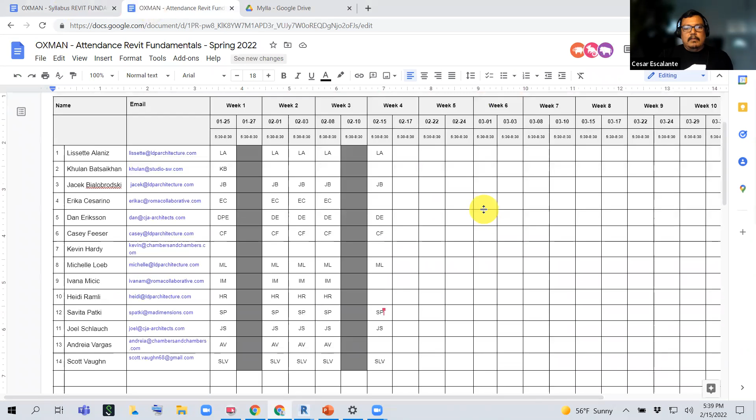It's Mylla_Hytt_start3.rvt. The link is on the chat panel, just click on it and download it if you want to start with my data set. If not, you can feel free to continue using your own data set. Okay, make sure you sign your name. I don't expect to miss any class moving forward, so we should be okay.

All right, any question about the schedule for today and the next couple of weeks? This week and next week, so the next 3 weeks, we're just going to focus on this data set for the next couple of weeks, and we're going to try to wrap this up by next Thursday.

And then starting in March, we will jump into documentation and data analytics. There we're going to jump into how we manage information inside Revit, how we add custom information, the different types of parameters and scheduling data, moving information in and out, and then additional documentation, workflows, detailing, phasing, managing sheets, etc.

All right, so this is the data set, hopefully everybody got that. I am on level 1, and I'm going to start streaming this on YouTube. Give me a second.

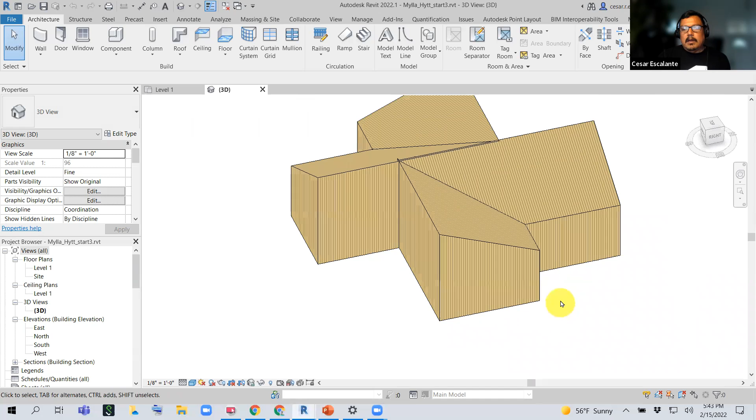All right, so we are on the Mylla house. Last time, where we left it was we created face-based walls derived from massing objects, and we created a representation of the house as you see on the screen. I helped some of you sort out some difficulties at the end of class.

One of the things I want to review quickly is how partitions connect in corner conditions, because I think I went very fast on that. For that, you don't have to do this yourselves. I'm just going to create two different types of walls and start a discussion on how that works.

So I'll have two walls connected at the corner, and then I'm going to switch one type with another, so we have two dissimilar walls connected at a corner. I'm going to switch this to fine, and you can see all these different layering systems.

One of the things I explained last time is that in a corner condition, there's always a primary wall and then a secondary wall. The primary wall is the one that dominates the corner condition. In this case, it's this partition.

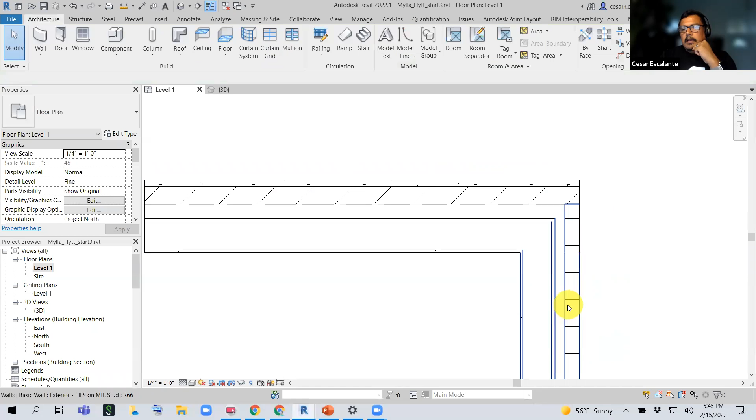And then the internal layers of the two different walls connect using the function and the priority number. If you recall, the priority number is a Revit way of connecting different layers that have similar functions.

The easiest to understand is the structural layers, that if they share the same materials, they connect seamlessly. That's why, in this corner condition, we have the core of this wall connecting seamlessly with the core of the other wall. They have the same width, the same material, so there's a clean connection.

Now take a look at this other one. This is a finish on one of the walls, and then this is another finish, and they have different materials. That's why you see that because they have different materials, they represent differently, and therefore you'll see that they abut, but they don't merge.

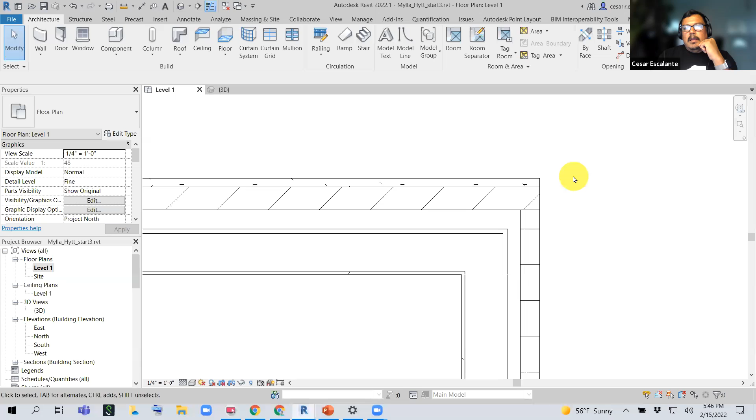The other thing we did in the last class is understand how corner conditions can be modified. We use this tool under the Modify tab called wall joints. Wall joints allow us to override the default behavior, or the default relationship, between the primary wall and the secondary wall. I'm going to illustrate now how this works.

So if I go into the Modify tab and hit wall joints, and hover over a corner condition, you're going to see this big square around the corner. It's just a way to identify visually a corner condition. As soon as I select it, I can cycle between different corner conditions using the options in the options bar.

So I have three options: butt connections, miter connections, and square connections. If I hit the next button here, I flip the primary wall in a corner condition. Sometimes you may want to do that, sometimes not. Let's see, and as you hit next, you keep cycling between potential options.

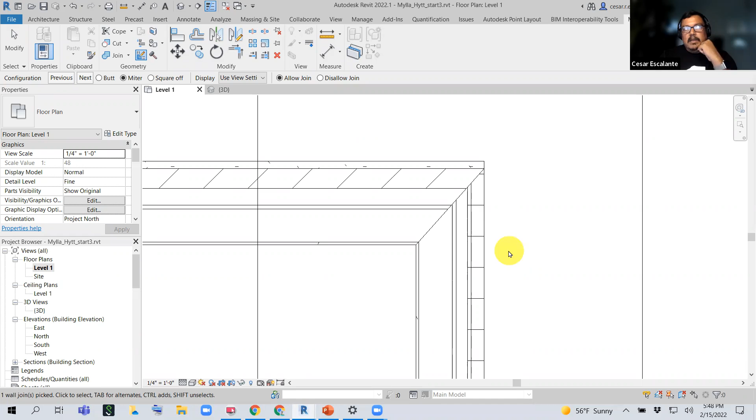This is sometimes not the way things get built on site, but if you're doing furniture construction or some kind of wood construction, sometimes that's the way to create those corners. And if you just care about the visual display of a symbol, sometimes miter works or creates the desired outcome.

Hey Cesar, remind me, right now when I look at my walls, it's gray and black, how do I get it to show all the different patterns? Yeah, just go into the detail levels in the view controls and switch those to fine. Ah, thank you. Yeah, when you switch to coarse, they are grayscale; when you switch to fine, all the layers are displayed.

Okay, so I was talking about corner conditions. We have the miter conditions. And then there's another one called squared off.

This is a condition in which layers of the same function will be forced to align perpendicularly.

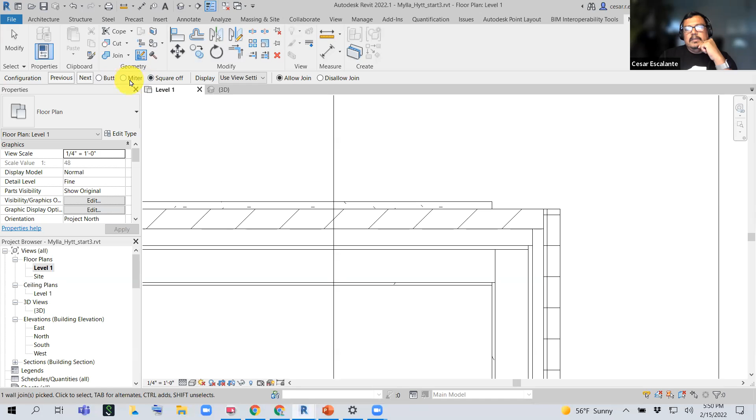Notice how the butt condition and the square off conditions are similar, but they differ when I have different angles. Right now the connection angle between these two partitions is 90 degrees, but as soon as I turn that to another angle, you can see now that this corner condition has a square off connection.

When I do it again, this is the corner condition. Butt condition is forcing the layers with the same function to connect, and square off makes the primary wall maintain perpendicular layers and make a connection with the opposite wall.

It's just different ways of dealing with that connection. And then when I click next, these are the different options that I have.

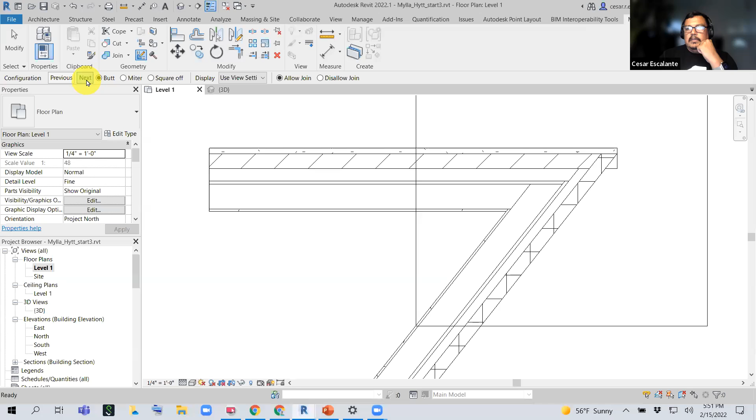So again, miter conditions - these are the two different options. When I click next, those are the different butt conditions. Then we have miter. Then we have a squared off. And every time you hit next, you get a different condition.

Now this is a Revit educated guess to display how connections work. It may or may not be how you actually build it on site, but I think as an educated guess, it's a good way to display it at a certain resolution. When it comes to crafting this at a greater detail, if this was a detail of a corner condition, I would review this with a technical eye and maybe make changes and amendments on how the different layers connect and the different connection types.

So I just want to mention that because I didn't explain it very well in the last class. Does that make sense?

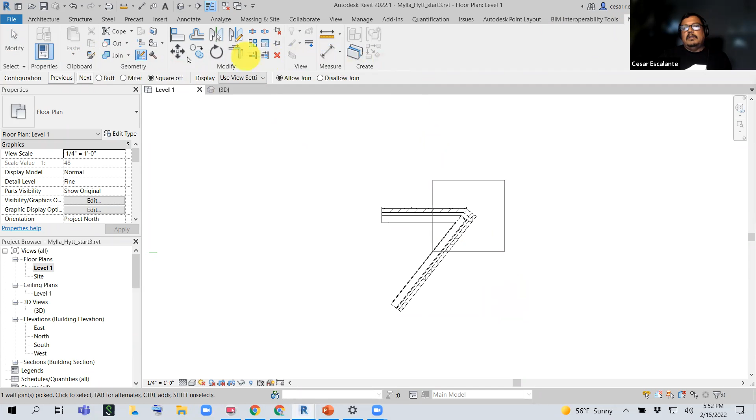Modify wall joins, and then you can navigate through different wall connection options.

All right, I'm going to delete this and let's go back to our project. What we're going to do today is continue looking at the interior walls, and there is a footprint in the background of how what's the display of different walls.

We're going to build new wall types based on existing ones. And so for the core, there are a couple of cores here, like restroom cores. Let's focus on this one. It's where the kitchen and the little restroom is at.

So this wall, I have to assume it's a simple partition according to the pictures on the Google Drive. It looks like it's all plywood finish and a wood core. And that's what we're going to do. We're going to create a new partition, and we're going to allocate material and textures and create one from scratch.

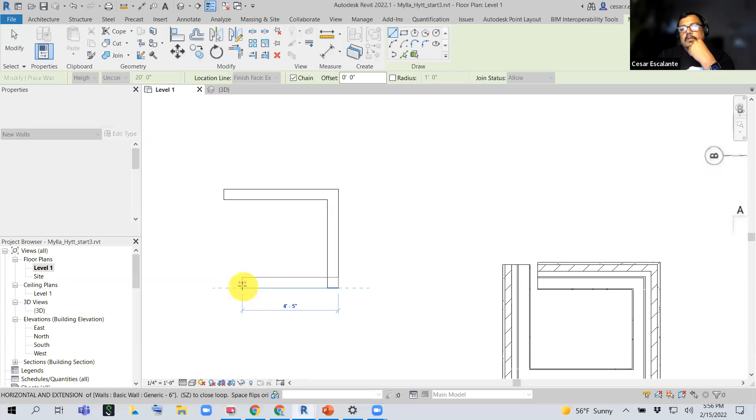If I create the wall using the clockwise direction, then the exterior side is going to be facing outwards. Now, notice what happens when I do the opposite direction.

Wall, generic 6 inches, and instead of creating it clockwise, I'm going to do it counterclockwise. So I go this direction, and when I do that, the exterior face of the wall is pointing inwards. That's why, in the last class, a couple of you created the walls in a different direction, and the walls appear a little offset from the representation in the background. I don't recall who did that, but when we create walls, we need to be cognitive about the direction in which we create them, because that's going to determine where the face of the exterior wall resides. Does that make sense?

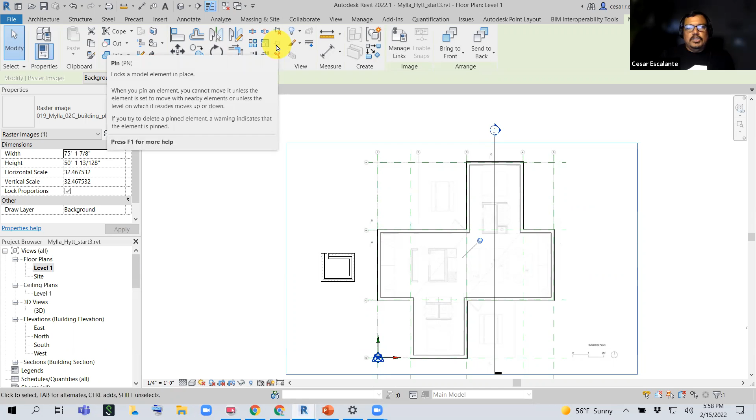All right, so I'm going to delete these two things here. Another thing I'm going to do is make sure that I pin this image. I think it's already pinned, but if you don't want to move it by mistake, select the image and use the pin tool. The pin tool is under the modifiers of the raster image in the contextual tab. And then you're not going to move it by mistake, which happened to a couple of you in the last class.

All right, so let's start with tracing this restroom. We're going to use a 6-inch stud wall, and we're going to use the exterior face as our tracing outline. So on the architectural tab, select walls, pick the 6-inch generic wall, and I'm going to do clockwise. So I'm going to start with this corner, and then I'm going to go to that corner. I'm just tracing the outermost line in the sketch space.

Then I'm also going to do the demising wall. So I'm going to create the demising wall here. Those are the walls I created.

You may want to switch your display to wireframe in level 1. The reason to do this is so that the image is readable and is not blocked by the objects themselves. So when I switch this to wireframe, I can still read the image, and the objects on top of the image are not getting blocked.

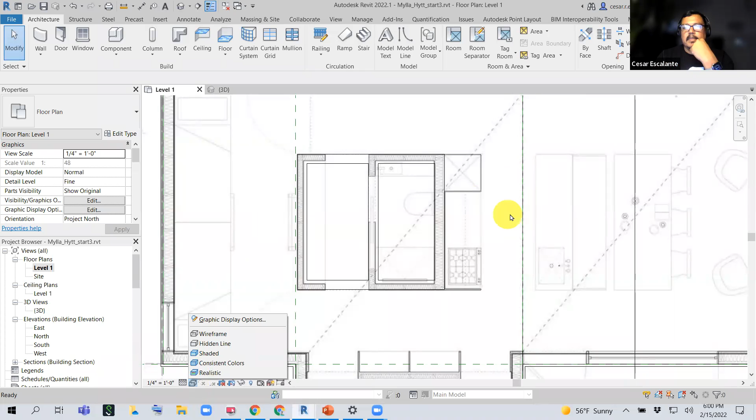All right, so this is the 6-inch partition. These appear to be 4 inches. So if that bothers you, we create 2 different partitions that are similar. With me, this was easy. We created 5 different walls using the exterior face as a location line.

And let's define the properties of this wall, the one adjacent to the kitchen. So right now, this is a generic wall. It doesn't have properties associated with that. So we're gonna edit the type of this wall. On the screen, select the wall and edit the type, which is gonna open the type properties.

And remember the three steps, I'm gonna create a new type based on an existing one. Again, this is something we talked about last week. So to create a new type, we duplicate, then we rename, and finally we change parameter values. We're always going to do this every time we create a new symbol based on an existing one.

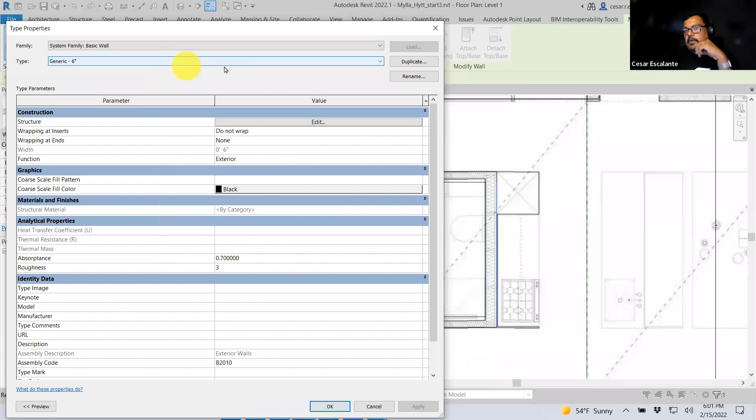All right, so using these three rules, I'm going to duplicate this type because I don't want to override the existing one. I'm going to give it a new name. Sometimes the name can be very descriptive. Some companies decide to name their interior partitions based on their internal standards. Maybe they have a code associated with that.

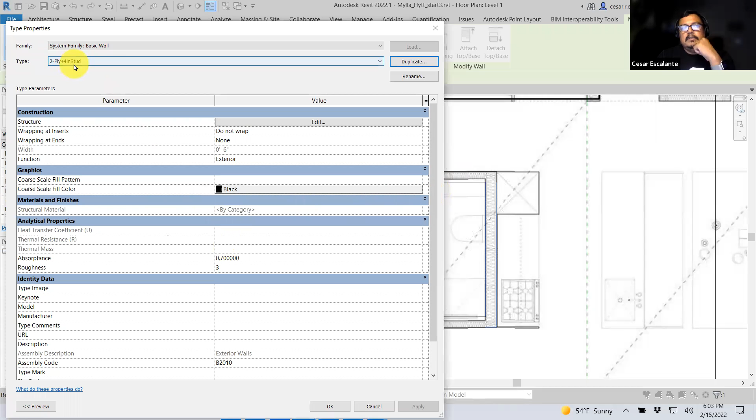I'm going to be descriptive here, so I'm going to say this is a plywood, 2 layers of plywood, plus a 4-inch stud. 2-ply plus 4-inch stud. And that way, when a user is trying to select the right partition, they could just pick it. You can discover the construction just by looking at the name. Naming partitions, again, it's all based on company standard. So I call this 2 plywood plus 4-inch stud.

Then I'm going to go into the structure. So edit the type. This is just 1 layer at the moment, and it's 6 inches in thickness. So I'm going to change the structural core to a 4-inch core.

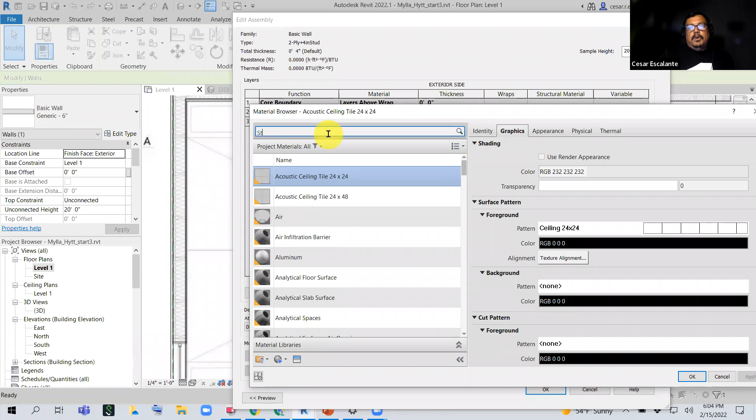Hit on the material, and then those 3 little dots, click on those, and we're going to assign a material. The material I'm going to assign is a wood stud. This is the material browser, which discloses all the materials that have been brought into the project via the template. And there is a limited set of materials here. Not all, this doesn't represent all the materials that you can build in Revit. It's just a subset of materials that was part of the template used to create this project. So I'm going to look for the word stud, or let's say wood. And there is a softwood lumber here that I'm going to use.

So my core is made of softwood lumber, 4 inches in thickness. And then on the interior side and the exterior side, I'm going to have 1-inch plywood.

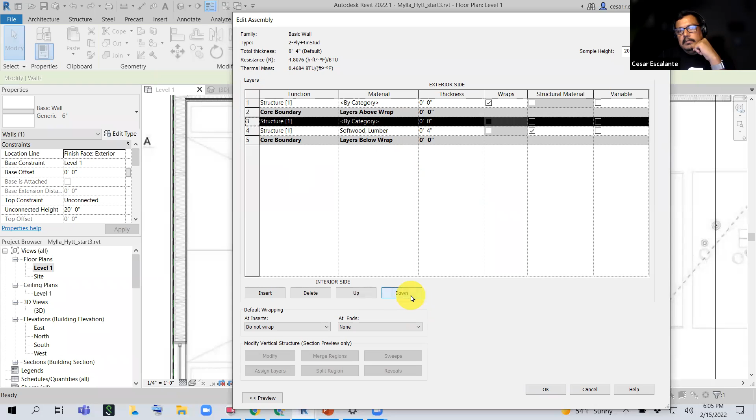So I have to add a couple of layers. To add a layer, you select a row. I'm going to select row number 1 and insert, and then add another one for the exterior and interior. These layers need to be properly placed in the right order, so I'll select row number 1 and use the down button to move the layer into the appropriate location. You can use the preview button to display how it looks. So again, when you insert 2 layers, select one and move it down.

The thickness for this layer is 1 inch. I know 1-inch plywood isn't that typical, but if you want to do 3/4 of an inch, you can do that too. The core is going to be 4 inches. The layers for the exterior will be plywood, so hit material and look for plywood sheathing.

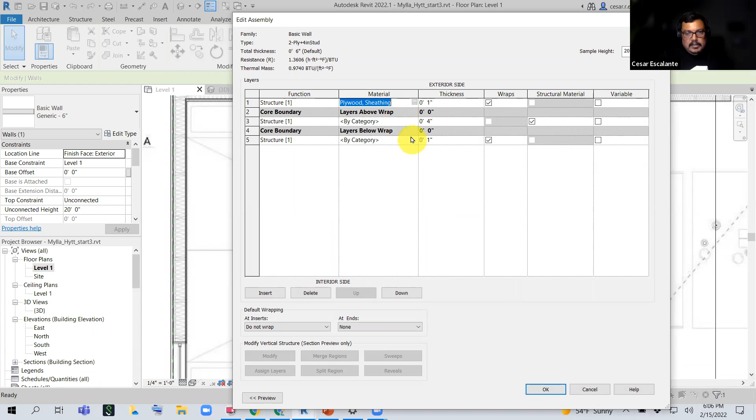And the same for the interior side. Instead of searching the material, you can copy paste materials from one cell to another using Control C and Control V. Then I'm going to change the function because they both share the same finish, so I'll use finish 1 for both of them.

Again, the structure was going to be softwood. So I have a new wall made of 3 layers: softwood lumber, plywood sheathing on the interior and exterior, 1 inch in thickness. And if you want to see it on the preview, this is how it looks like. It looks yellow because yellow is the shading color inside the material definition.

Let me show you that. If you see this color definition RGB, that is sort of yellowish, and that's why this looks that color. And then I hit OK.

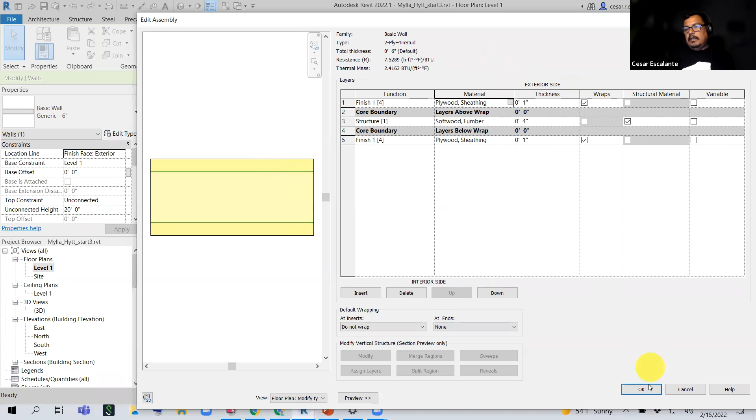Another thing I want to do is display these walls as solid black when I switch to coarse view. So in the type properties, under the coarse scale fill pattern, I'll assign a fill pattern of solid fill. Notice how it says coarse - that means when the view resolution is set to coarse, these walls are going to switch to black color. So I hit apply here, hit OK, and I got my 6 inch wall in this location.

Any question here? Was it easy? Do you want me to repeat? All good here?

All right, so I'm going to repeat the procedure, and well, all these are generic walls, right? Let me show you a very nice shortcut that we use quite often in Revit, and that's match property. Match property copies the type properties of one object and applies it to another one. Or in other words, it swaps the type from one object to another type.

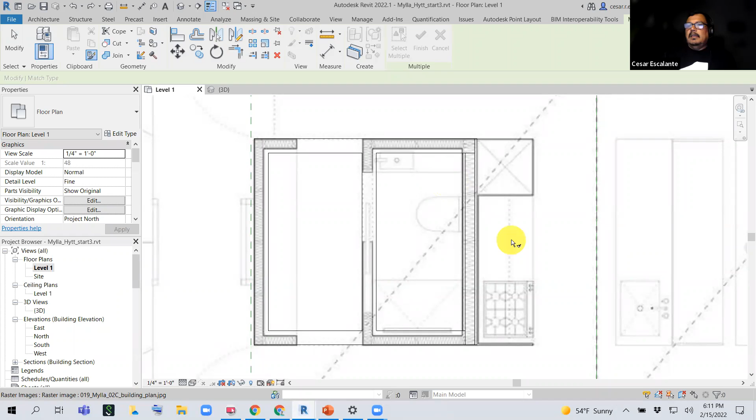All right, I'm going to do it again. I'm escaping here. So to use the match property, just type on the fly MA, and now you'll see the cursor turns into a little brush, a white brush. That means it's like you're about to paint something, so you place that brush into the paint bucket and pick the properties of that object. When you select the property of that object, the cursor turns black - it means it's already wet. Then you apply that same properties to the rest of the objects.

And then you can continue applying it until it's finished. So again, MA is the shortcut for match property, and this is frequently used in modeling. It's easier to apply match properties than to select a wall, look at the type selector, and then browse all the different types and swap them.

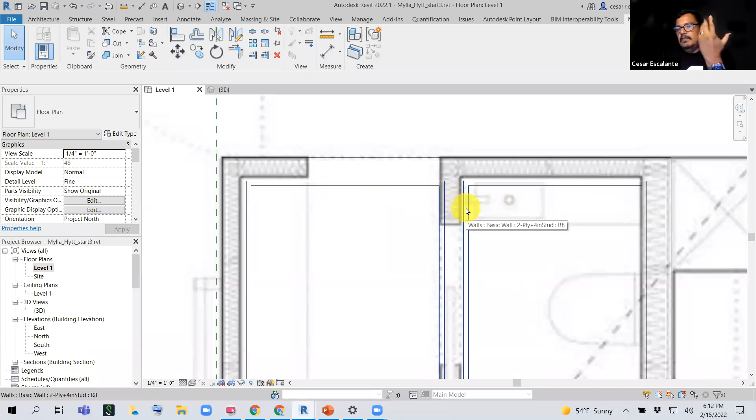Now, if we want to follow the sketch in the background, it looks like these partitions may not be 6 inches, but probably 4 inches.

What I can do is create a new wall type based on an existing one and change the core properties, but I'm not going to do that. I'm just trying to save us time here. If you feel compelled, you can do it on your own.

Any questions here? Now let's look at this. This is a representation of the insulation.

Revit walls, unfortunately, cannot have embedded type definitions of insulation, but we can place those representations on top of it. These are view specific objects, found under the Annotate tab, where you'll see something called insulation, which creates a batt insulation of a certain type.

This is going to be inside the cavity, so I'm going to make this 4 inch. Then you click a point at the center of the wall, and a point at the opposite end, and hit escape. That creates a graphical representation of batt insulation.

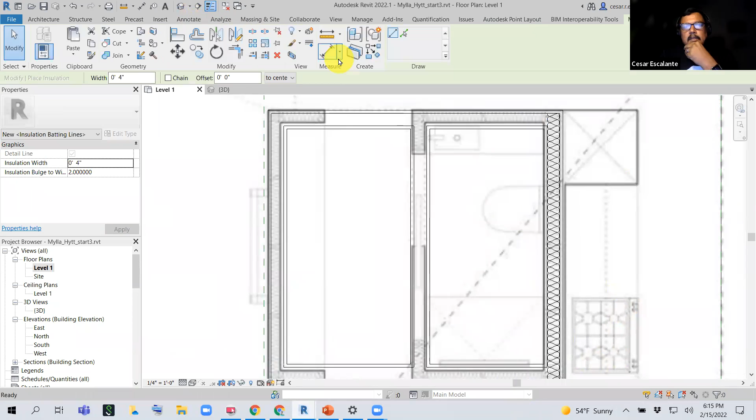Again, I'll escape and repeat the instruction: go to the Annotate tab, into insulation under the detail panel, change the width to 4 inch, and draw it at the center of the wall.

I'm just doing this to follow along with the representation in the sketch in the background.

These batt insulations have a density between the bulges that can be changed. That's an instance property. So if you want this to be denser, you can change the ratio from 2 to like 1.5, which makes it bigger, or change it to 4, and the batt looks tighter.

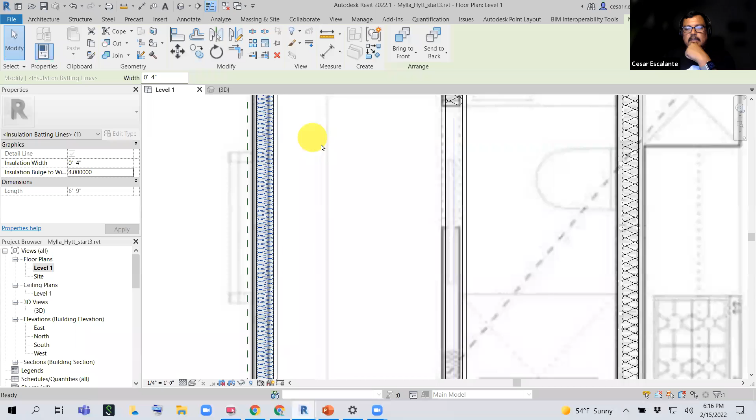It's this instance property of the batt insulation. The bigger the number, the tighter the representation. I'm changing this to 4 just so you see the effect, but it doesn't matter.

Okay, easy. Let's look at this in 3D. So this is what's happening in 3D.

Our walls, when we create a wall in Revit, the default height is 20 feet. This wall has been created from level 1, and it's 20 feet up in the Z direction. But we can force the walls to extend to the underside of the roof using the attach button. Let me show you how that works.

I switched to a 3D view. You just click the 3D house in the upper left side. To extend this wall to the underside, let me just check that that's the way it is in the pictures. Give me a second.

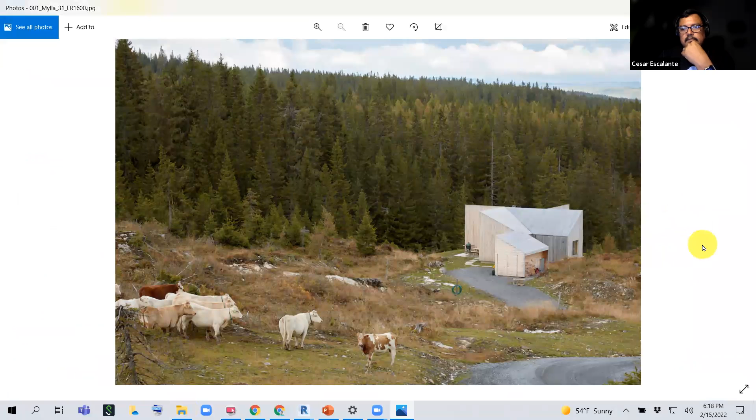I'm going to open the file and look at some of these pictures here. I'm not positive it might not. No, you see, they don't extend all the way to the underside of the roof. They might go, I'd say, 7.5 feet or 8 feet.

Let's do 8 feet. It looks like here on the top, I don't know what those kids are doing upstairs, but it doesn't look like that's a playground.

So it's not going to go to the underside of the roof, and what we're going to do is select these walls and change the unconnected height to 8 feet. We'll do it for all of them - you can control select and change the unconnected height to 8 feet, and that should take it under the roof.

Any question about partitions? Okay.

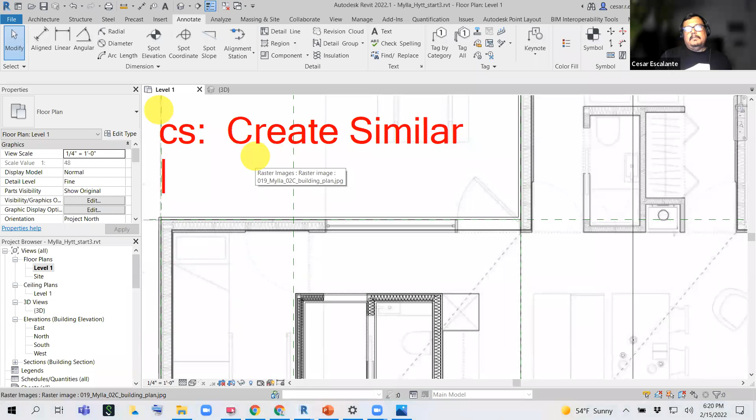Type CS, and it will create the same object you have selected in a different location. So another frequently used shortcut.

So if I want to create another wall here, you just select the wall. Make sure you don't pick the insulation - the insulation batt is not a wall, that's a graphic. So select the wall, then type CS on the fly, create similar, and it's going to create exactly the same type of object selected using the finish face exterior.

Then I'm going to trace over these walls in the clockwise direction so that the exterior side is pointing outwards. I'm going to create another one for the demise wall.

You can move objects using the arrow keys. Let's see, I'm going to very quickly create a new type, the 4-inch partition - you know the process.

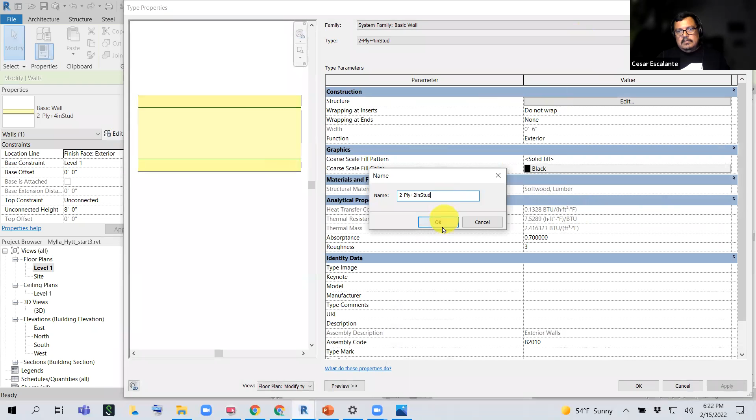So again, I'm going to edit the type, duplicate, and instead of being 4-inch stud, it's going to be, I don't know, 2-inch stud. Then edit the type and just change the structural core to 2 inches.

Then match property - the shortcut for match property is MA. Pick the source and hit the destination. I may do that here as well, because that seems to be a smaller partition.

Notice how here I have a combination, like there's a thick partition, and then there is a 4-inch partition associated next to it. This wall needs to be split in two.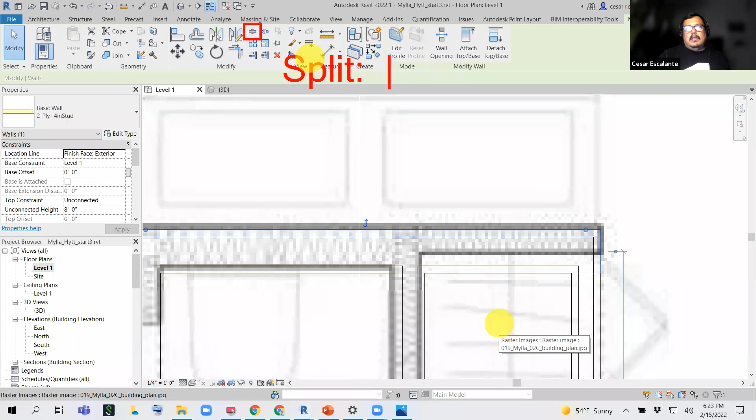I'm going to show you the modifier called split. This little square indicates where the split command is, and split divides a wall at a selected point. When you hit that icon, the cursor is going to turn into this X-Acto knife, and then you pick a point in the wall and it's going to divide it in two.

Then you can swap the type from one to another and have this dissimilar width wall. So again, split, the cursor turns into this X-Acto knife. Select a point in the wall. I think Revit likes to select points that align with wall faces. Escape.

Then this little piece of wall, I'm going to swap it from one type to another. I'm going to use match properties, so MA. Modify match property, pick the source, pick the destination.

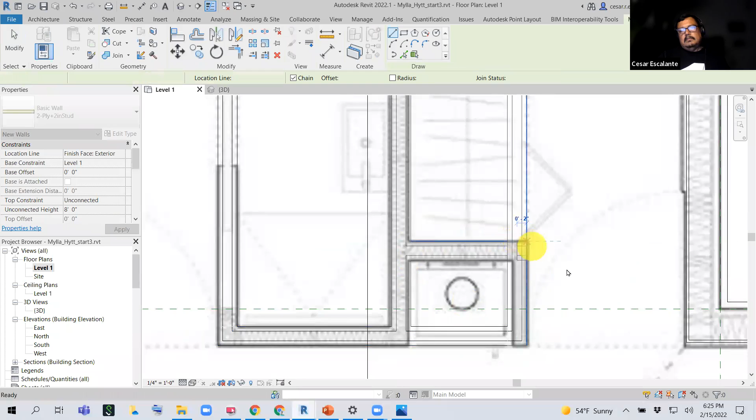I also have to create this one. So architecture wall, or I select this one and say create similar, CS, on the fly. Again, select this one, CS. And I have that. Now I have my second core, sort of similar to what the background looks like.

I'm going to look at the interior of that. Let me see if I can find it. Yes, in that core, I think that this is a section through that bedroom, and those indeed go all the way to the underside.

The second core, the first core, which is in front of the kitchen, they go 8 feet above ground. This one is going to go to the underside.

Once you finish creating these walls, let's switch to a 3D view. You can switch this to wireframe in 3D to display the interior walls, and this is going to allow you to pick walls and extend to the underside of others.

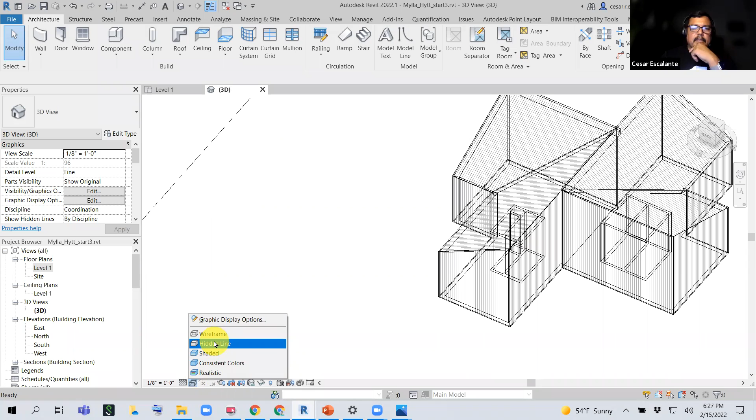So these are the walls I'm trying to select. You can switch to wireframe, but I don't recommend working on wireframe because this is going to start to get really, really busy. So one thing you can do is enable the section box of a 3D view and create 3D cuts.

Again, if you want to do this with me, switch to a 3D view. Then in the property window, select the checkbox called section box. This guy here. Section box, again, it will enable a crop boundary around the 3D model, and you can use this 3D boundary to create 3D sections.

So I'm going to pick a section here. I'm going to pick one of the crop boundary faces. Now you can see how I can start trimming the building in 3D. The reason I'm doing this is because I want to be able to pick the walls and extend them to the underside of the existing roof.

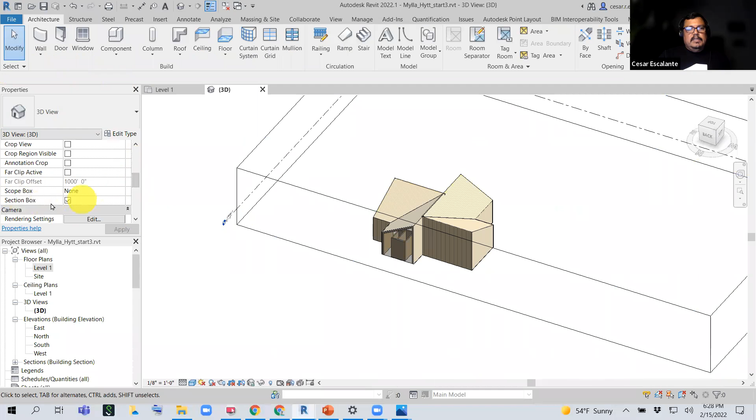So now that I have my 3D section box, again, you go to the property window and enable the section box. Select the section box in the 3D space, grab the double arrow control on the north side of the building, and just stretch it enough so that it discloses the core that I want to change. And this is how you extend a wall to the underside.

All right, any questions here? Anybody want me to repeat anything? All good? All right.

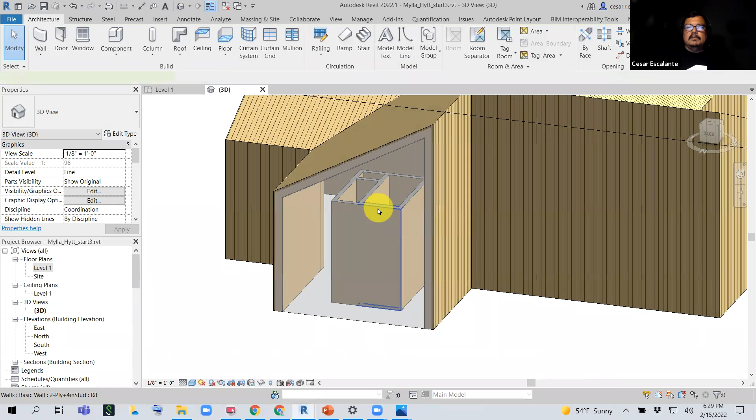The interior walls of, Cesar, yes? How do you shrink the walls in the first place? How do I shrink this wall? Yeah, because they were 20 feet and you made them smaller. Where did you do that? Good question. So you select the wall and then in the instance properties...

Check the unconnected height. I don't know if I have that. Select the wall and then unconnected height. I don't see unconnected height anywhere, all I have is constraints. It's just not an option in the menu. Maybe I'm in the wrong place. I don't know, it should be, if you select the wall, it should be right here. Constraints. I don't, okay, it's not, I'm sorry. Now I see it, thank you. Yeah, it's an instance property of the wall. Okay, thank you.

Anybody else have a question?

So to expand on that, the height of the walls can be specified as unconnected height, or it could be associated to a level. In this particular project, I only have one level, I don't have multiple levels. So I can force the wall to go from one level to another if I choose the top constraint. But in this case, it's unconnected with a specific height of 8 foot.

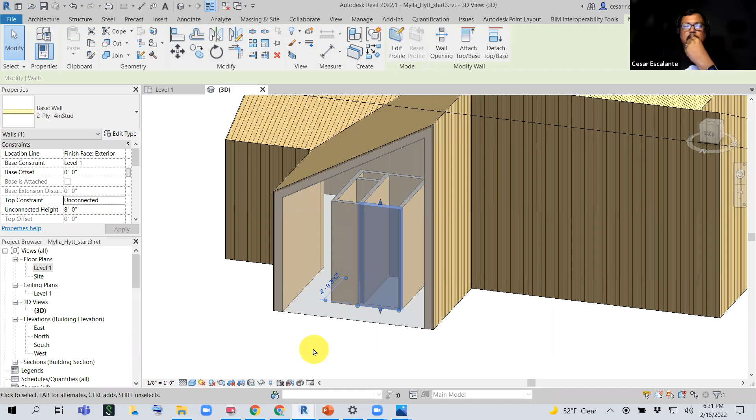Okay, walls. What we're going to do now is to force the wall to extend to the underside of a roof. And to do that, we're going to use this command called attach top base. The reason it says attach top base is because you can extend the top of a wall to another surface, or you can extend the base of a wall to another surface. It depends on what you choose.

To enable that command, select the partition, and I'm probably going to start with the one in the back so that it's visually better to work. So I'm going to select the wall in the back, and then this is the contextual tab, the modify walls tab, and you hit attach top base, and then you pick the wall you want to extend it to. Let's see if I can attach this to this.

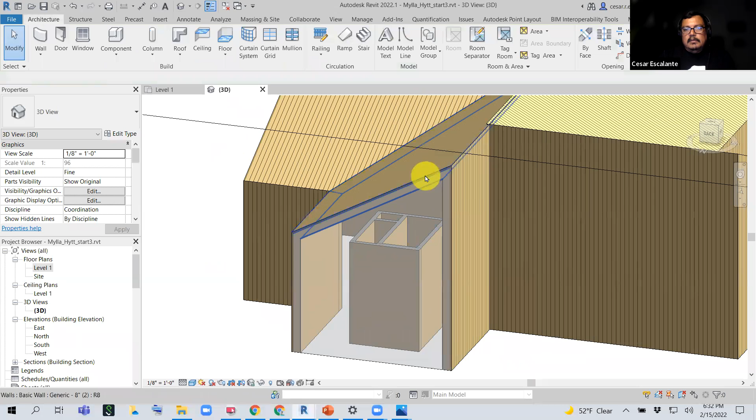Oh, you know what? It's not going to work because this is not a roof, it's a wall. Attach this to this. Damn, it's not working because I built this as walls. So for your records, you can only extend walls to a roof, but I cannot extend it to another wall.

Let's see if I can use roof instead. I select this wall and I swap it to generic roof. I'll have to recreate it. Oh crap.

Let me try something here. I'm going to hide in view the category, and let's see if it works there. Attach top... yeah, it's not working.

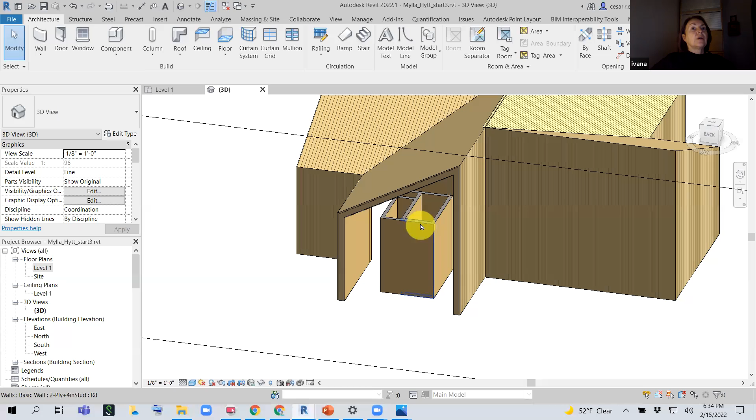Could you change it in the instance properties table? Can you change in the table the top constraint? Can you select something else instead of unconnected? I can assign it to levels, but okay, the roof is not a level. There is no level, but there's something I can do.

But I need to switch to elevations to do that. So I'm going to go to the north elevation. And what I can do is extend walls to a reference plane. So let me try it first, and then we'll do it together. I'm going to go to the architectural tab and create a reference plane and use this sloping surface.

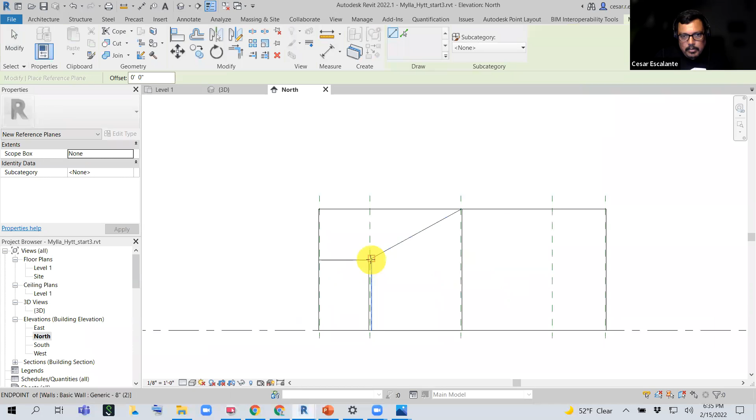I'm going to create a reference plane here, and maybe move it a little below so the wall doesn't... no, let's try that. I'm going to select this and give it a name: sloping roof. And I'm on the north side. Then I go to 3D view, select this, and attach.

No, I stay on the north side. I switch this to wireframe. Then I select this wall, I just hit tab until I select it, and attach top base to that. Yeah, there you go. So let's do it together.

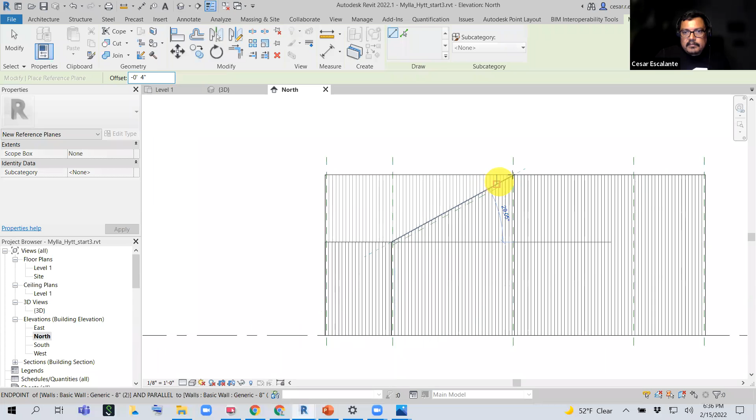So what I did is go to the north elevation, and then I created a reference plane. I gave it an offset of -4 inches so that the reference plane is a little below the top of the roof. Then I snapped it to this inclined surface, so this is a sloped reference plane. I use tab to cycle and be able to select it. This is our reference plane, and walls can extend to a reference plane.

Again, in architecture, reference plane, I use the line tool, and then I give it an offset of -4 inches, and 4 inches from where I pick, it's going to create that reference plane. I switch this to wireframe so I can see the walls behind. I just hover over and hit tab in order to cycle on all the objects below. I select one of the walls, attach top base, select the reference plane, and it will go to that reference plane.

And I need to repeat the process for each of the walls. Again, tab, attach top base. You can also do a window selection, grab all those walls in the core, attach top base, select this, and then they all go to that work plane. That makes sense.

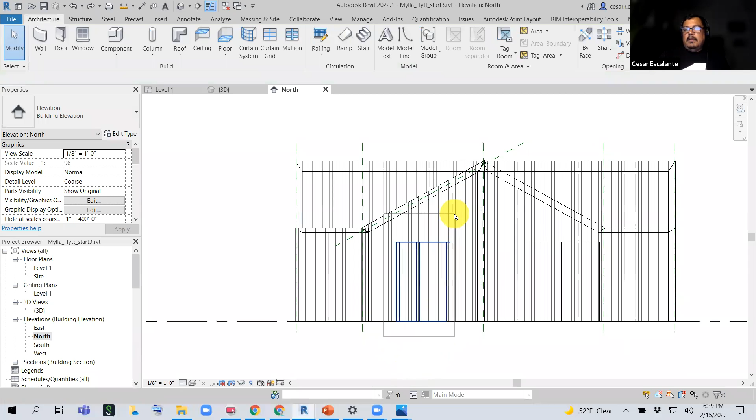So repeating, I can do an enclosing window selection, which is a window selection from lower left to upper right side. Make sure you do not select any of the exterior walls, just the walls on the core. Then hit attach top base and select the reference plane, and all those walls are going to go to that reference plane. Then in 3D, they look like that.

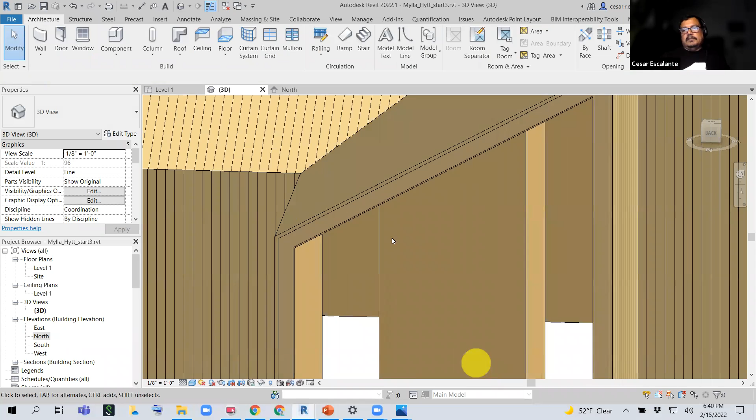The reason I choose to use a wall instead of a roof is to allow for a clean connection at the corners. Notice how the walls and the roof have a very clean connection here. If this was a roof, it will be stopping.

Sometimes you have to use these things in Revit to make things display properly the way you want.

If you finish this with me, feel free to do the same thing at the other core. I think this also extends to the underside of the wall. But I'm looking at the time, so let's do it quickly. These all seem to be like 4 inches, so I'm going to make it all with 4-inch walls, create similar.

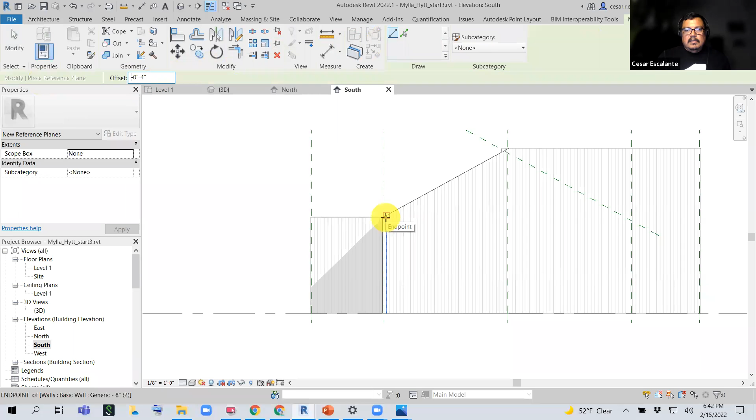Create the reference plane. I'm going to tab select it and extend it so that it's easier to select later. Then switch to wireframe, and select those 4 little walls, 5 walls, and attach top base to that reference plane. And now I got that.

I'm going to pull this in 3D just to display this. There you go. This is one room with the extended walls, and this is the other one.

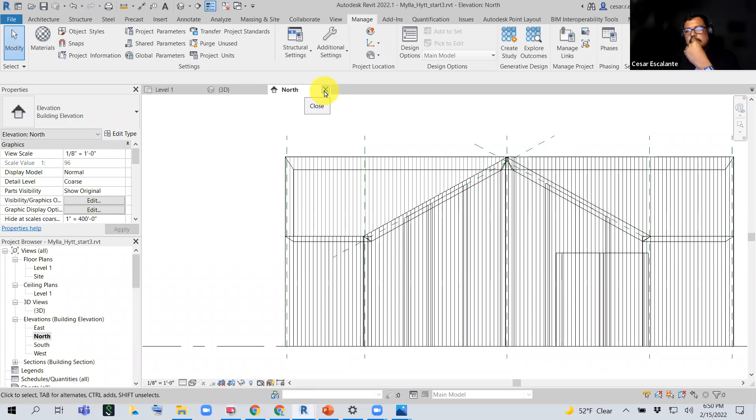All right, it's almost 6:50. Anybody has a question? Anybody need help on the walls? It was pretty straightforward. I guess the tricky part here is to make sure that we have the appropriate reference planes and that we're able to select walls and extend it to the underside of that work plane.

Okay, I want to create for the next 20 minutes a discussion on how to create a floor. A floor is a system family that utilizes sketch lines to define a boundary. This is the first time we're going to create a sketch-based object.

Floors, if you recall my slide deck, we have system families and loadable components. Loadable components are things you load from an exterior library into Revit. Windows, doors, and furniture are examples of loadable components. And then we have system families, which are the hosts of those components. The walls, the floors, the roof, and the ceilings, those are examples of hosts.

Now, when we create a floor, we have to define what is the boundary of that floor. Revit switches to a temporary display called sketch mode. Sketch mode is the contextual tab that only allows me to create sketch lines. And sketch lines are these purple lines that must be connected into a closed loop in order to create a representation of an assembly. So let me show you how to create a floor. I'll do it first, and then we can do it together.

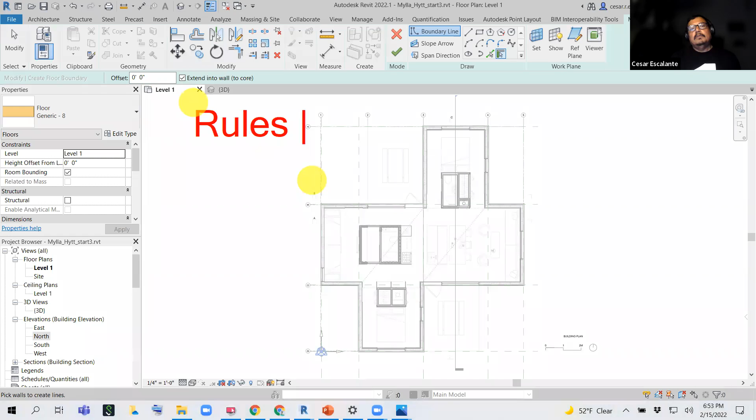There are two rules for sketch lines. First, all sketch lines must be in a closed loop. Second, all sketch lines must not overlap. If you don't follow these rules, Revit's going to get angry at you.

It's going to display this message that it cannot create the assembly. Sketch lines must be a loop of connected lines—if there's a gap between those lines, you won't be able to create the floor. And the lines must not overlap; you cannot have two sketch lines on top of each other or overlapping.

Let me give you an example. When I create a loop of boundaries, notice how there is a gap here, and then I click the green checkbox, Revit gets angry and says you can't do this because the loop is open. So you must continue and close it.

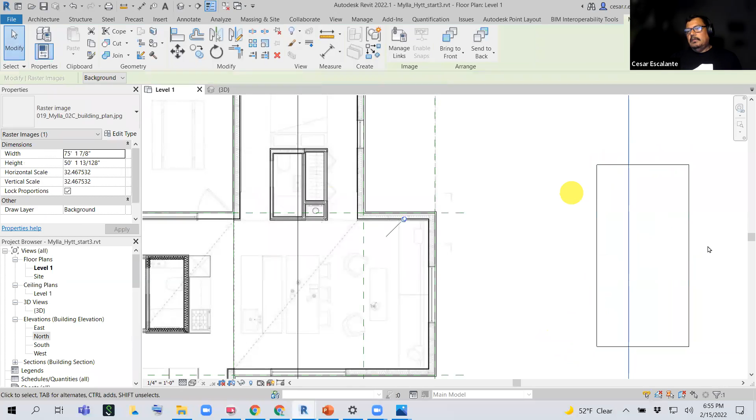Alright, let's do it together. I go into the Architecture tab, Floor, and I'm in sketch mode. How do I know? Because I am in the contextual tab—I see the draw tools, and the only way to get out is by clicking the green checkbox. Now I'm going to build lines using the line tool, and then pick the floor type. I'm going to use a generic 12-inch.

Maybe this is concrete—I'm sure this is concrete. But I don't have a concrete floor here, we can work on that later. So I'm going to create a generic 12 inches, and then we're just going to trace over the intersection of the lines. Remember, our walls are aligned with the core exterior, and we use those reference planes as guidelines, so all I'm doing is tracing over those intersecting reference planes.

I'm just going to go all around the walls. If you happen to make a mistake, like I'm doing right now—oh, this is a mistake—then just hit escape, delete what you did, and continue placing boundary lines. I'm snapping to the intersection of those reference planes, putting those segments aligned with the core of the building.

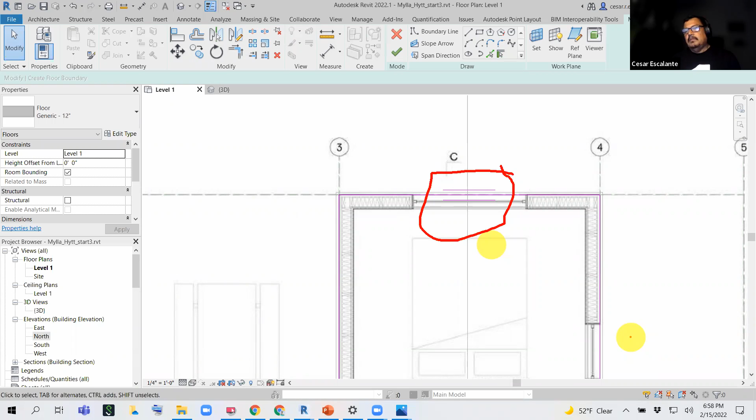Diaphragms have primary directions as well, so structurally it's important to indicate what the direction of a slab is. You can swap the direction using this span direction option—pick another line, and that double arrow will pop up. You can actually pick any sketch line to indicate the span direction.

Because this is concrete, it doesn't matter that much. But when you use corrugated metal assemblies, it's important to understand the flute direction. For corrugated floors, these indicate the direction of the flutes, and when you cut a section, you can actually see the flutes in the section representation.

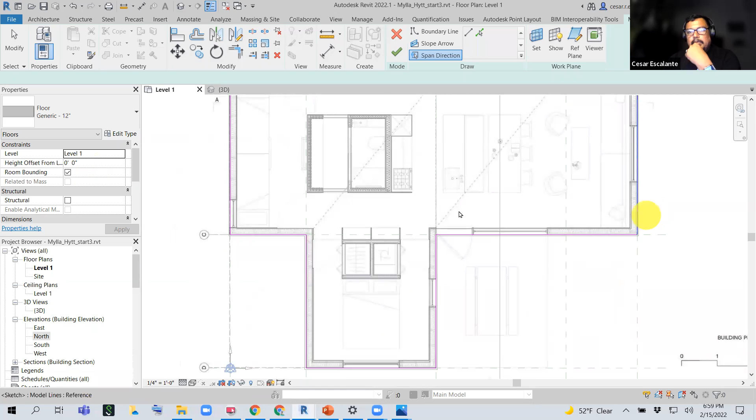The floors are associated with levels so they can be scheduled. By default they are room bounding—you can see that in the instance properties. Once you finish the loop, just hit the green checkbox and the floor should be completed.

Now I made a mistake, because the floor also extends into this patio. To go back and edit the floor, select it—notice how it's getting difficult to select floors from a floor plan. You can do a window selection and just filter the floors out of that selection. That's one way of selecting it.

Another way is to hover over the edge of the slab and hit tab until you see the boundary of the floor pop up. No, that's the mass—tab, tab, tab, raster image—it's getting harder to do using tab. Here's floors. I'm looking at the display in the lower left side; when I hit tab, I can see what the pre-selection is cycling through there. So hover over and hit tab repeatedly until I get the floor—that's where I click.

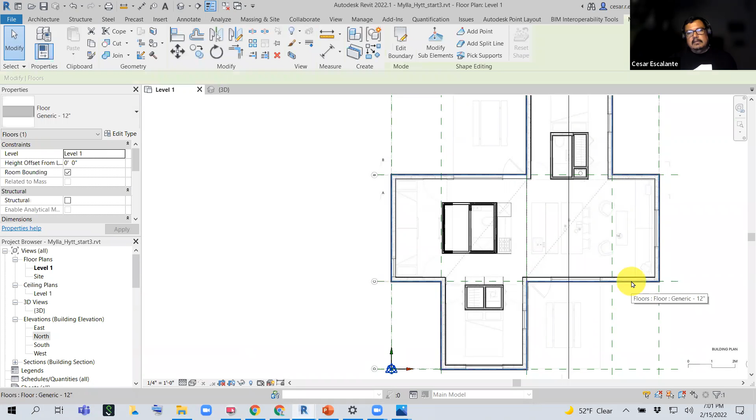Or you can use a filter selection, doesn't matter. I'm going to edit it because I have to add a portion of a floor right here and another portion of the floor right there for the picnic tables.

So to edit a floor, you just hit edit boundary in the contextual tab, and this is going to take me back to sketch mode. Here I'm just going to grab this purple line and snap it to the edge of the picnic table area, and I'm going to do the same on this other side. Grab the edge, snap it, and then hit the green checkbox.

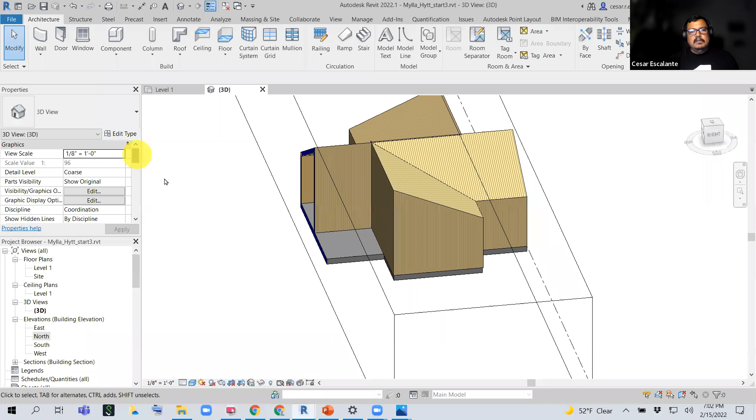Then when I switch to a 3D view, this is the 3D view of the roof of the floor. And I want to disable the section box. This is where we're at right now.

Okay, the floor must be a concrete floor. So if I want to associate concrete material, I have to create a new type based on an existing one and give the structural core an associated structural material. So that's exactly what I'm going to do. Select the floor, edit the type in the type properties, duplicate it. I'm going to call this concrete 12-inch.

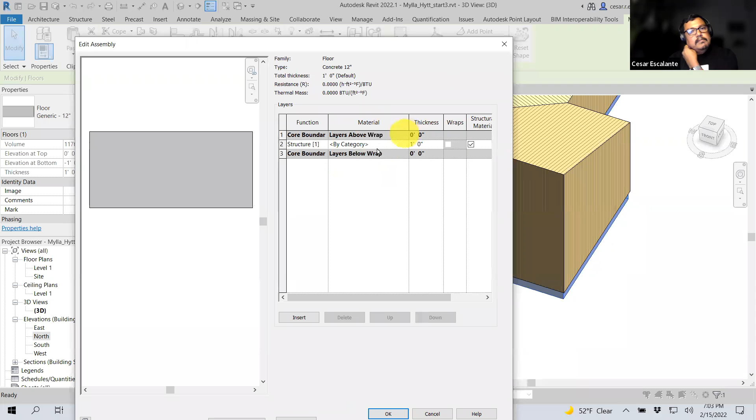And in the structural layers, change the material to concrete. I'm going to pick the concrete lightweight—there's another one called precast. Concrete lightweight. Then this is how the material is going to represent in projection and in cut.

Then hit OK, and now the floor appears with a concrete pattern. And if you look at details, I think this is what I was looking at. The core of the wall is sitting on the edge of the floor slab. The reason is that I'm going to make the exterior layer overlap a little bit on top of the slab, but I'm going to do that next class.

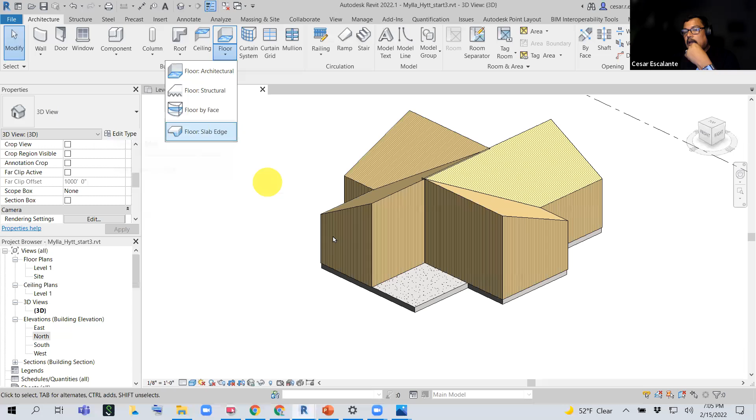Any question regarding the floors? I could have built the floors using face base as well—there's an option here called floor by face. But in this case it didn't make sense because I needed a single monolithic floor, and I also needed to extend it to the picnic areas. So I didn't use that method here.

Cesar: how do you turn off the section cut view? Turn it on or turn off it? Well, I still have mine on. I want to turn it off. In the 3D view, yes, sir. You scroll in the 3D view properties and disable the section box. That's right. Thank you, sir. There you go. Section box. Uh-huh. Cool.

All right, let's place at least one window and then we call it off, and then we're going to complete the windows for next class. So if you look at the elevations, these have probably two or three types of window sizes, like a small window and then a large window.

Because these elevations are in scale, I can actually measure it. And it looks like these windows are about 5.6 by 5.6 approximately.

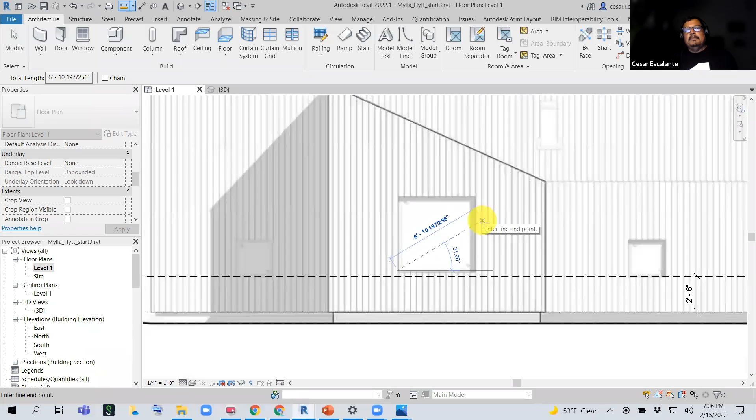Windows are loadable components, and this project came with a predefined set of windows. If you scroll down in the project browser for the windows, you're going to see that there are some fixed sizes, and these windows come with the template that ships out of the box. But according to the sketch here, I need windows that are 5.6 by 5.6. I guess this one is the same as this one.

So those, we're talking about a window that is 66 inches by 66 inches. And when I look at the list of windows available to me, I don't have a 66 by 66 window. So what I need to do is create a new type based on an existing one. We've done this with walls, but we can do the same with windows.

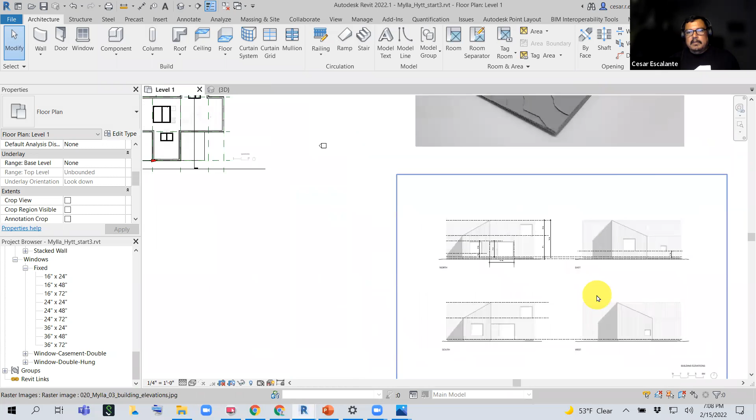So the first thing to do is start with a placeholder and then change it: duplicate, rename, and change parameter values. So I might do this in the 3D view. And I know, according to my floor plan, that I need a 66 window on the south side.

So in a 3D view, I'm going to do it in 3D—you can also do it in floor plan. In my 3D view, I need a 66 by 66 window here, and I'm just going to grab this one, the 24 by 24. To place a window, you can just select it in the project browser, drag it, and drop it on a wall. It's a component family, so it needs to be hosted by a wall. You cannot have this type of window floating by itself—a window really needs a wall in order to exist. So drag and drop the 24 by 24 and touch the wall, and there you go. The location doesn't matter.

It's a placeholder, and what I'm going to do is create a new type based on an existing one. You know the rules already: we edit the type properties, duplicate, rename, and change parameter values.

Select the window we just placed, edit the type, duplicate it, and this is going to be 66 inches by 66 inches. I'm following the nomenclature standard of the types as listed in the project browser, but you can give it your own name if you want. So duplicate, rename, and now I just change the parameter values. The width is 66 inches, or you can type 5'6", and the height is the same, 5'6".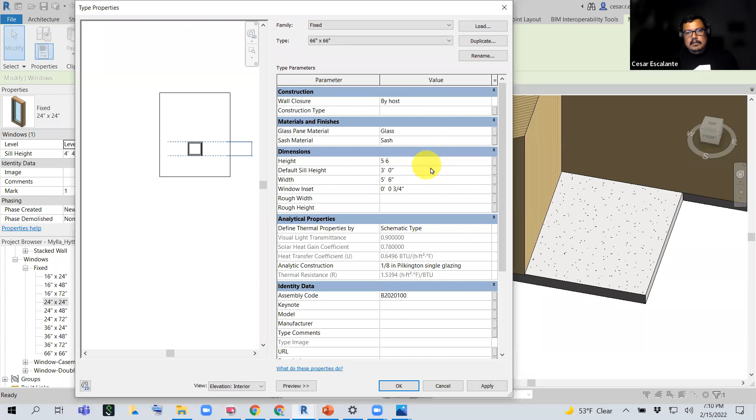Hit apply, hit OK, and that's my window.

According to the floor plan, the sill height of these is 1'6". So I'm going to go to the 3D view, select the window, and give it a sill height of 1'6". You can edit the sill height using the temporary dimension, or you can use the sill height in the instance property—it's the same value. I'm going to use the sill height in the instance properties and set this to 1'6". Again, you don't have to type the feet and inch character.

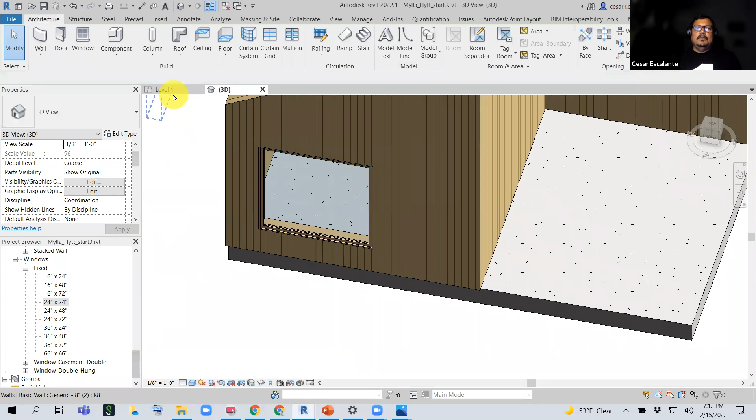To place the window equally centered in the room, it's best to do that in the floor plan. So in the floor plan, here is the window I just placed, and I'm just going to move it. Now, how do I make sure that's exactly half of the wall?

You can make reference to the temporary dimensions that appear in plan, but that's sort of eyeballing it. If I want to be completely sure that window is halfway, this is what I'll do—I'm going to do this twice. I'm going to create a dimension string and then apply the equal constraint.

I'm going to create a dimension string using the aligned dimension. You can find the dimension commands in the quick access bar, and then create a string of dimensions. Notice how I'm snapping to the center of the window, then snapping to the center again—this is the dimension string—and what I'm going to click is the equal control, which forces an element to be equally distanced.

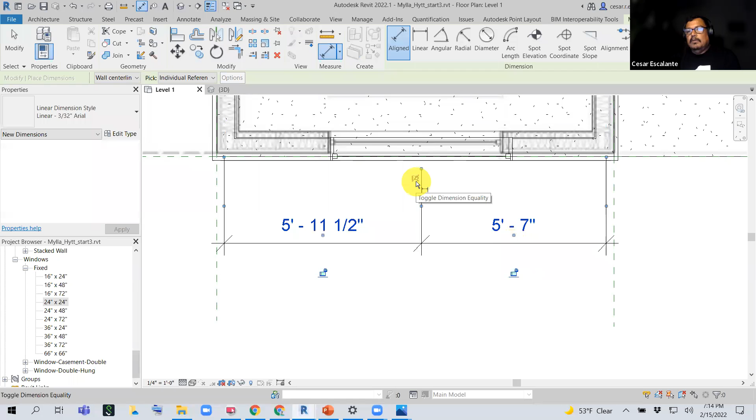The last click is a placement click, and you just place the string at a certain distance away from the wall. Once the dimension string is placed, hit the EQ icon that appears in the dimension string, and that's going to make the window equally spaced between the left and right wall. Does that make sense? So this is the south wall, the south window placed correctly.

If you want to go ahead on your own and place the rest of the windows, you can do so as well. You can make use of the elevations I provided here—these are the 4 elevations in the building. I believe the same window is used on the north and south, but there's a smaller version of the window on the east and west.

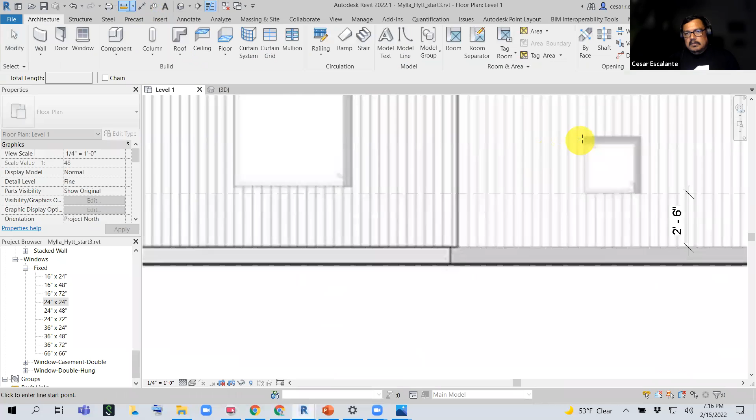We're going to do this next class—create the smaller window. I believe this window might be 24 by 24. Let me check... no, it's more like 2'8" by 2'8". That means we need to create another type for this window, and then we can place it accordingly in all the facades.

Okay, so I'm going to save this file, and then save it in the Google Drive in the Mylla Hytt folder. I'm going to call it start 4. We're going to pick it up from here next class. If you want to access this file, you can do so as well—Mylla Hytt start 4. I'm going to share it also next class. Let me open the final house to see what we're going to do next class.

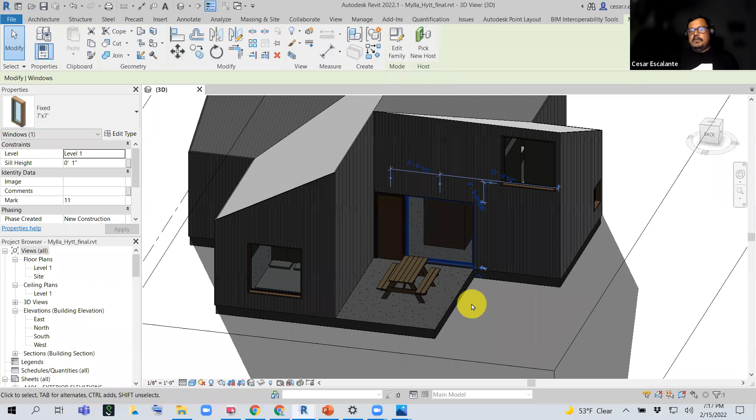We're going to place all the different windows, and then talk about curtain walls. We are going to build this big window at the ground level, the entry level, as a storefront. We're also going to apply different final materials, like this plank veneer that's about 8 inches wide. I'll show you how to create new materials based on existing ones and apply new textures.

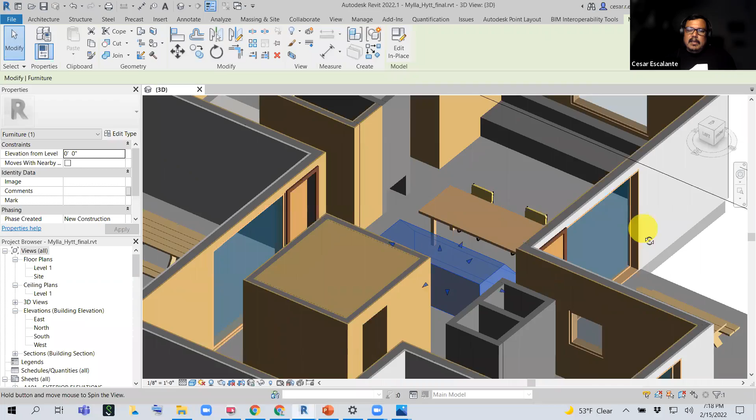We're also going to focus on the furniture, loading typical pieces like bunk beds and queen beds, then focus on the kitchen. We're going to do a lot of interiors in the next couple of weeks, and create a custom piece of furniture, like this custom counter. I'm going to show you how you can create one.

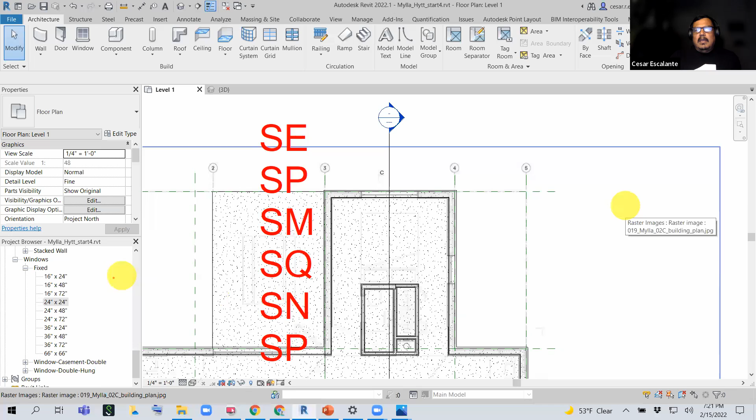And there are many others — there's one called snap perpendicular, which snaps perpendicular to another line. If there are a lot of divisions on a line or wall, like dividing one line into 4 parts, can we choose the nearest snap point? For example, if you wanted to divide a line into 4 portions, is there a way to snap to that? No, there's not, in Revit.

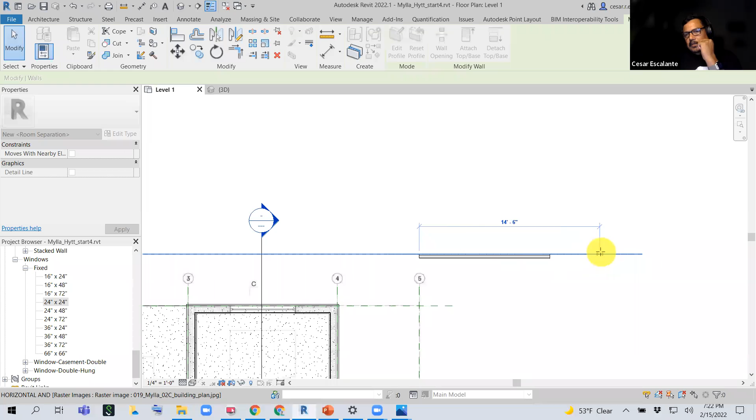You know how in AutoCAD you can create a grid, and then snap everything to the grid? It's not like that here. You can stretch things and make length changes to elements. You see how it snaps in certain increments, but that's the result of the zoom factor. If I zoom in more, look at the temporary dimension — it's snapping every 1 inch. That's pretty much what you can do. If I zoom out a lot, the snaps happen every couple of feet, so depending on the zoom factor on the view, you can snap to different increments.

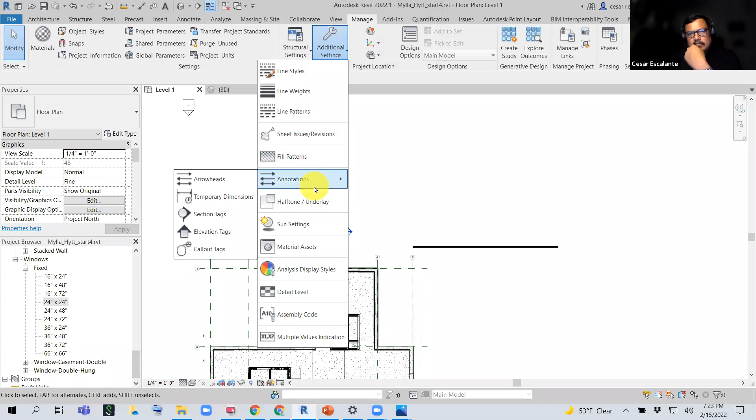And I believe those settings are under the Manage tab, additional settings, or options. There is a place where I can set that, let me find where it is, because I forgot.